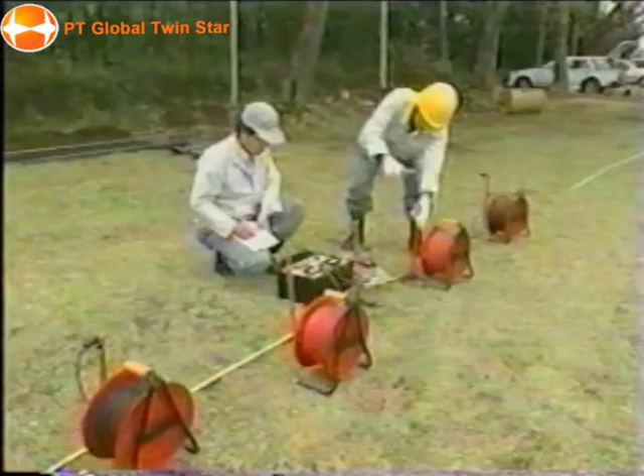Let us introduce the standard work procedure of SAN-EARTH type M5C used for grounding works. Before actual grounding work, solid and exact design work is vital and important. Once the grounding site is selected and the requested grounding resistance is decided, first of all, measure the ground resistivity of the work site.

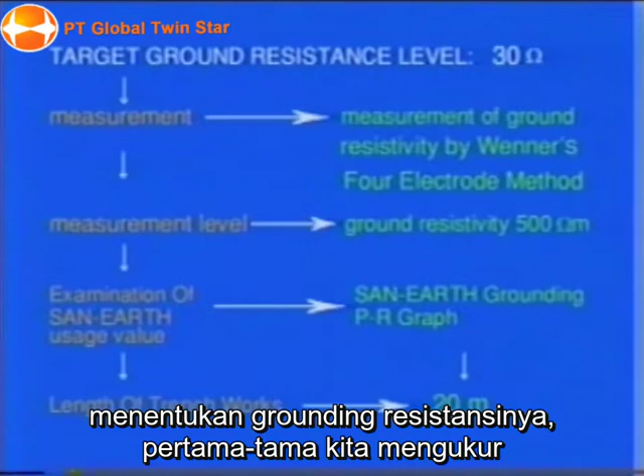Using Wenner's 4-electrode measurement method, the result is used to calculate the construction length of SAN-EARTH grounding. If the design work in this way has been completed, the site grounding work will be next.

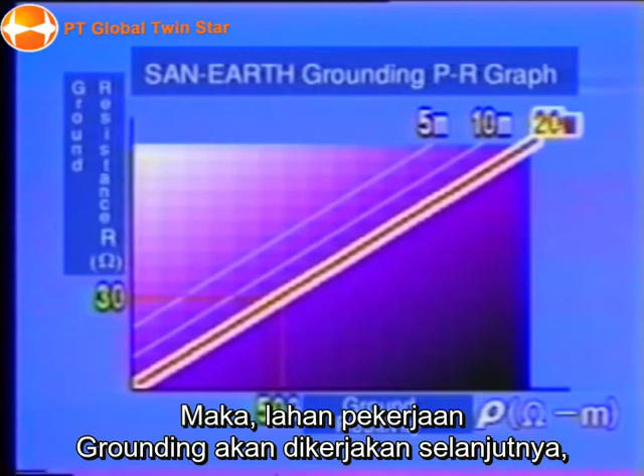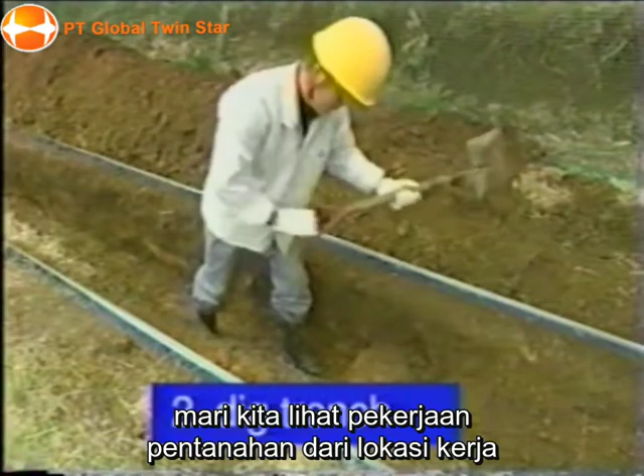Let us look at the grounding work of the work site. Firstly, dig a trench with width more than 50 centimeters and depth 75 centimeters approximately. This can be done manually or by machines utilizing a backhoe where the work site permits. In either case, level the bottom as flat and even as possible.

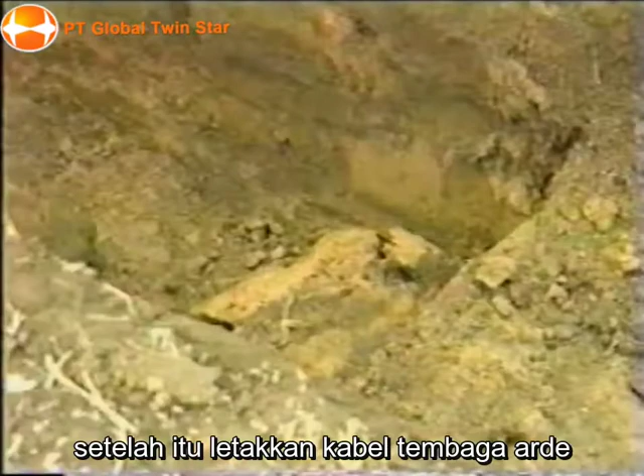After that, lay the grounding copper wire in the trench. About 22 square millimeter size is sufficient. Lay the wire by holding the wire roll so that the wire lies straight at the center of the trench.

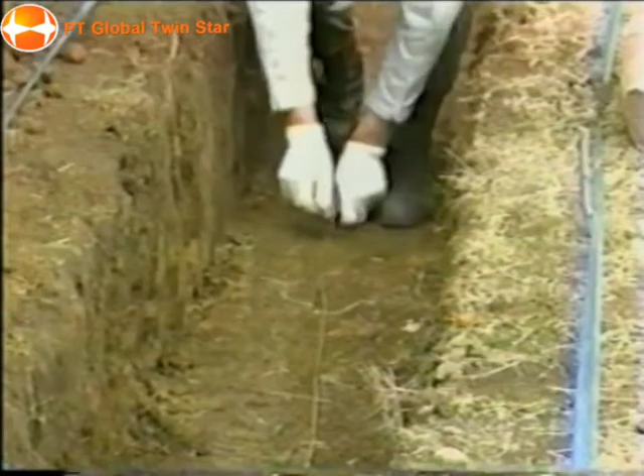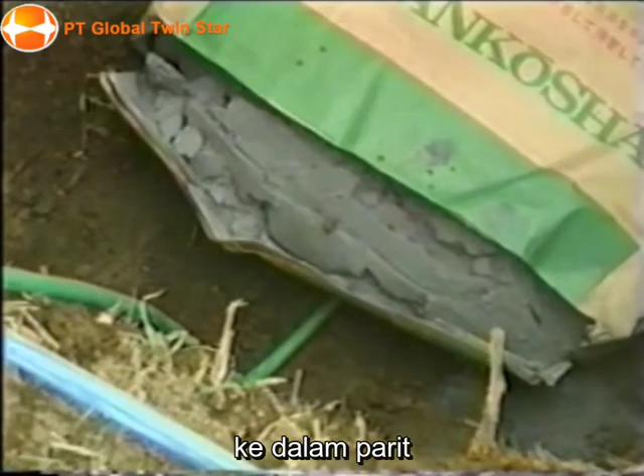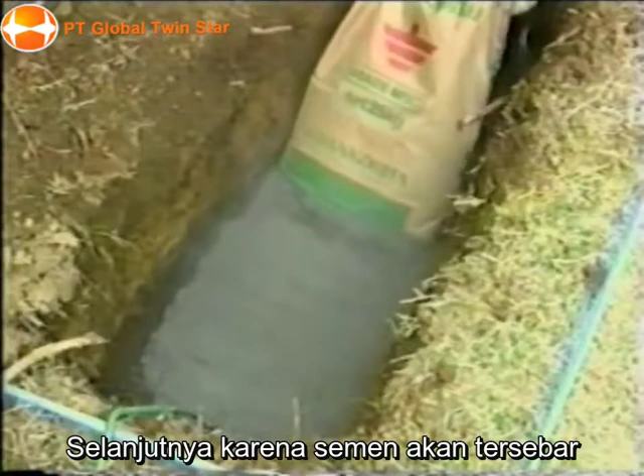Next is SAN-EARTH laying work. Place SAN-EARTH type M5C along the trench at 3-meter intervals. Cut the bottom of the bag by cutter knife and while dragging along, shake off and spread evenly into the trench. A 25-kilogram bag is good for about 3 meters laying work. Furthermore, since it will overspread while laying, it will be good to carry it out against the wind.

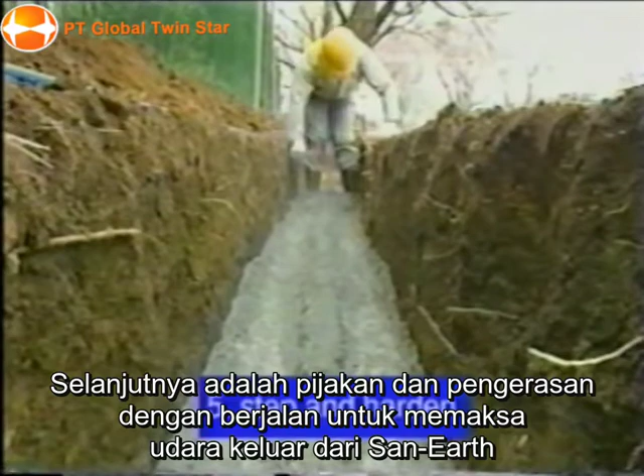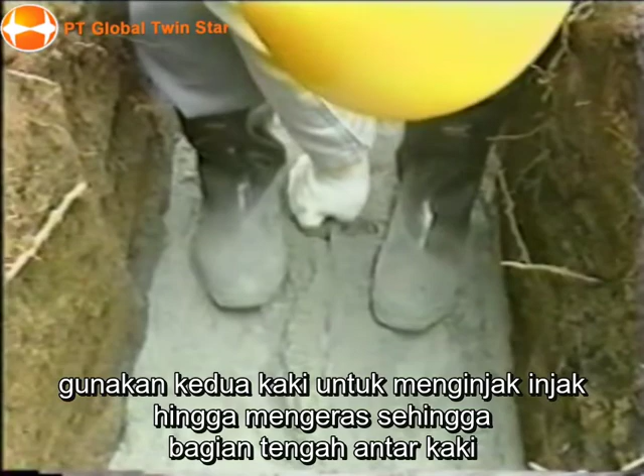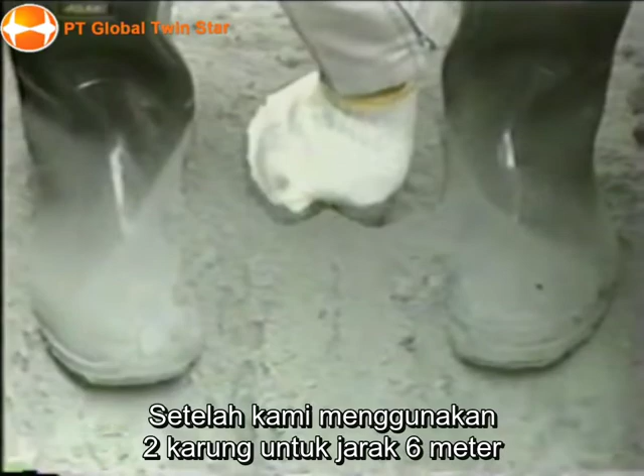Next is stepping and hardening by foot to force out air in San-Earth. Firstly, pick up the laid grounding copper wire, use both feet to step and harden so that the center part between the feet becomes higher, and the wire is fully packed and covered by San-Earth. Furthermore, it's more effective to carry out this process after every 2 bags, 6-meter interval, before San-Earth absorbs soil water and becomes hardened.

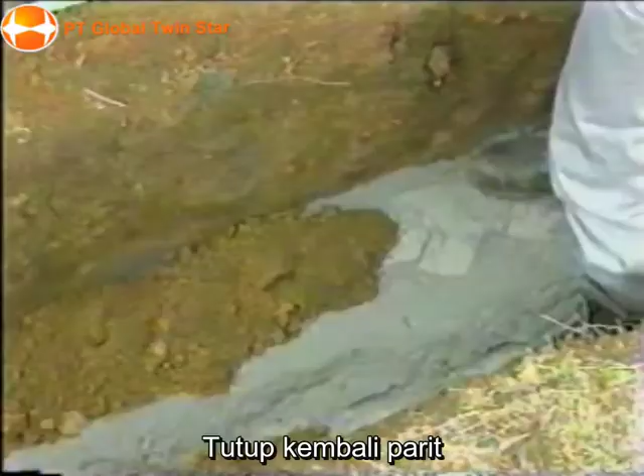After the stepping and hardening process, cover back the dark soil into the trench. In the beginning, cover back the dark soil which does not mix with stone from both sides of the trench gradually. The copper wire should not be left visible above San-Earth when covering back the dugout soil. Then step and harden it.

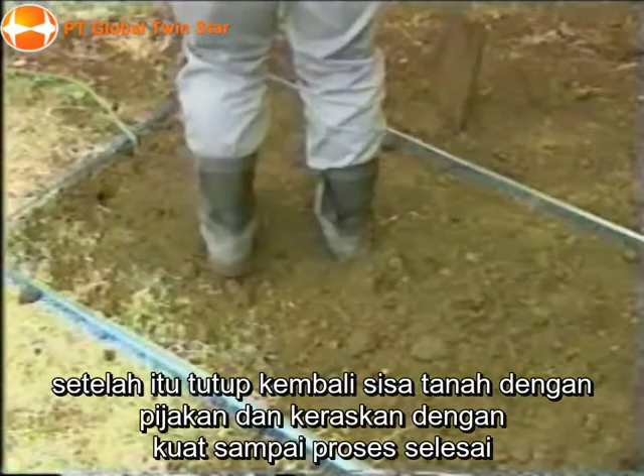Different from other resistance-lowering material, the grounding resistance can be measured at this point of time. After that, cover back the rest of the soil, step and harden firmly, and the process is finished. After finishing the process, the measurement of grounding resistance comes next. Confirm whether the expected value can be obtained or not.

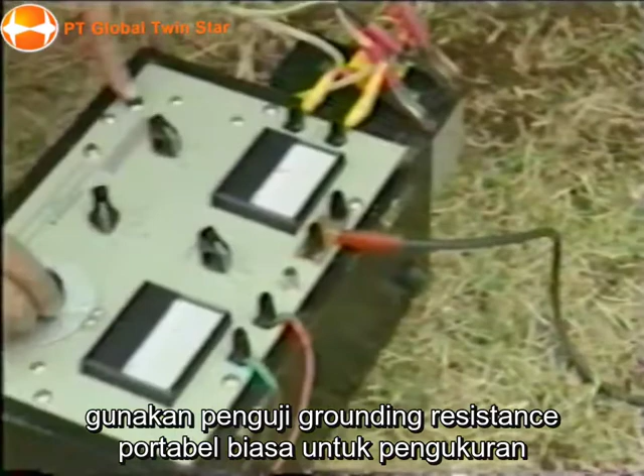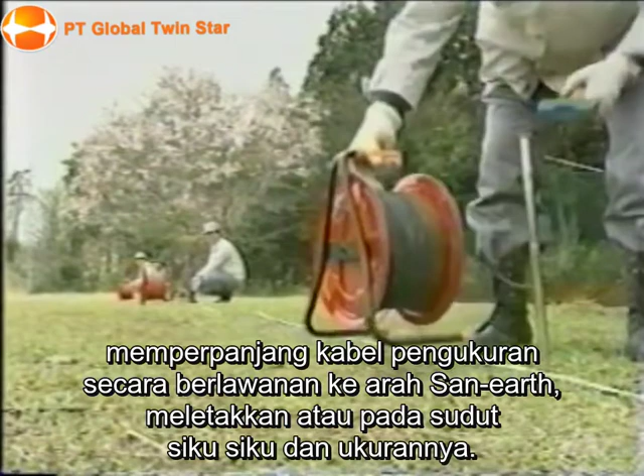Use the normal portable grounding resistance tester for measurement. This is called the 3-electrode method. Extend the measurement wire opposite to the San-Earth laying direction or at a right angle to it and measure. The above-mentioned procedure is the San-Earth type M5C standard work introduction.

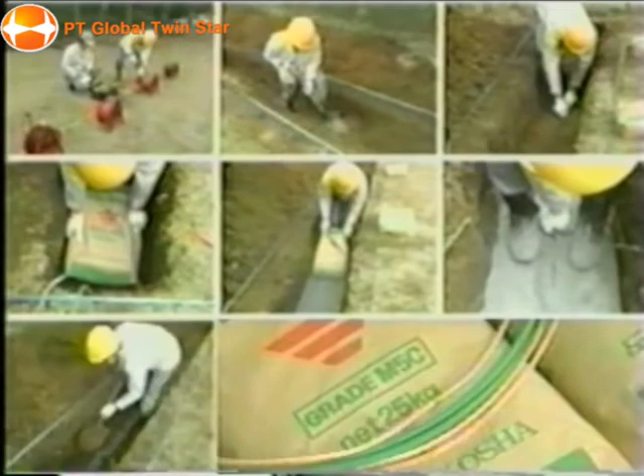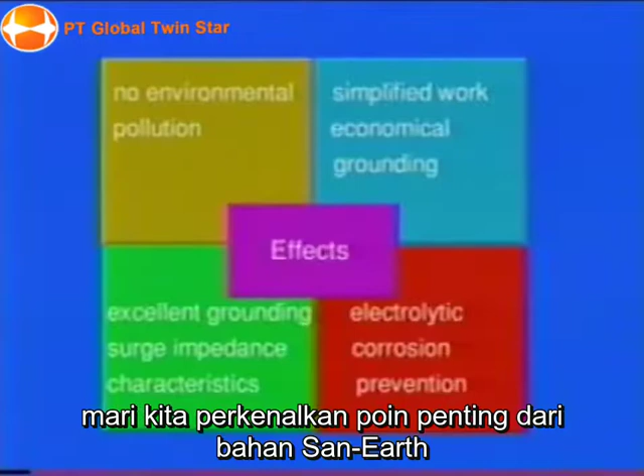Let us introduce the strong points of San-Earth grounding material. As you can see from the grounding work procedure, San-Earth type M5C is used in powder form and laid in a belt shape during works. Low grounding resistance can be obtained from good contact of wide surface area with the earth.

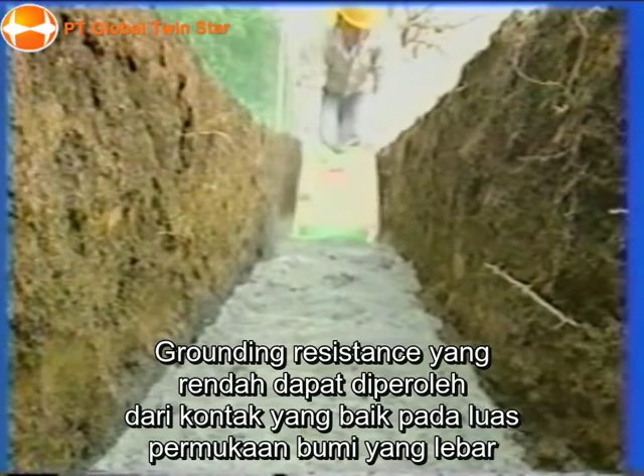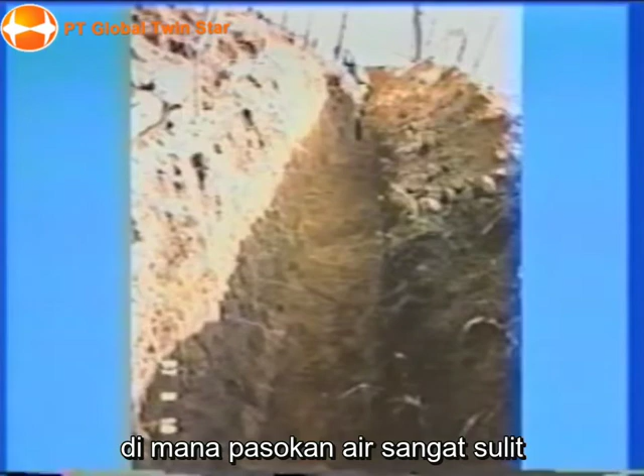Furthermore, water is not necessary during grounding work. It is more suitable for mountainous or remote areas where secure supply of water is very difficult. In areas which have roots after felling or lumbering, or rocky projections from the ground, grounding works will not be hindered and therefore great saving in labor is possible.

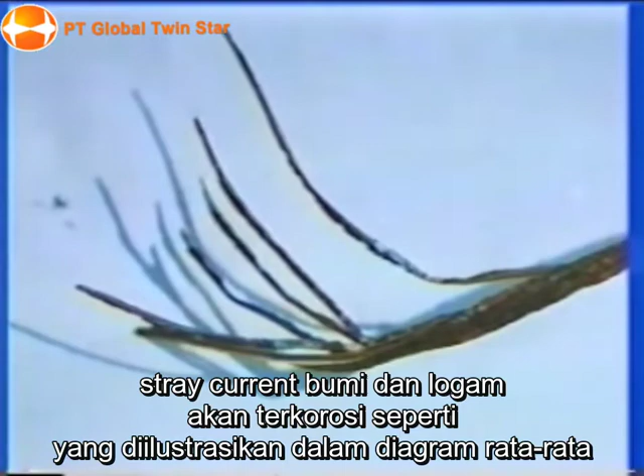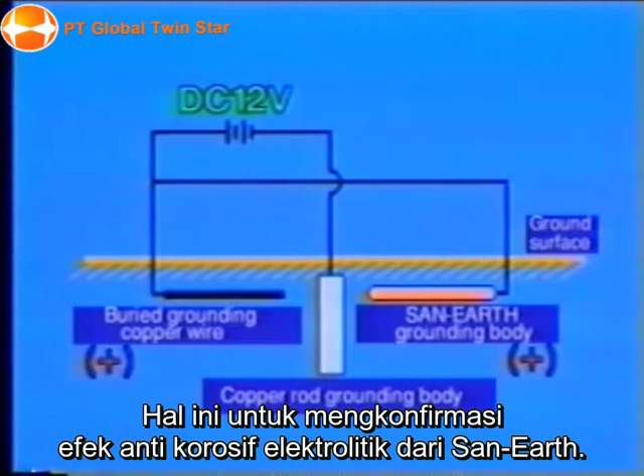For metals laid underground, there will be electrolytic corrosion due to the earth's stray current and the metal will corrode. As illustrated in the diagram, an average current of 60 amperes flows for a 75-day period in the experiment circuit to compare the corrosion situation. This is to confirm the electrolytic anti-corrosive effect of San-Earth.

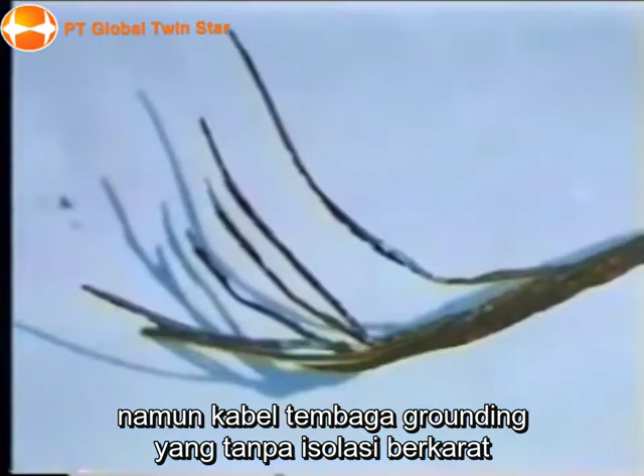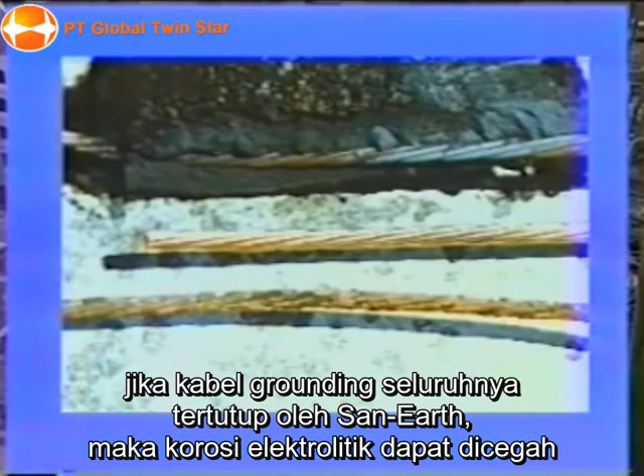As you can see, the wire covered by San-Earth is not corroded. However, the bare grounding copper wire is corroded and became tattered and ragged. If underground metal is completely covered by San-Earth, electrolytic corrosion can be prevented, and disconnection or breaking of wire due to grounding electrode corrosion can be avoided.

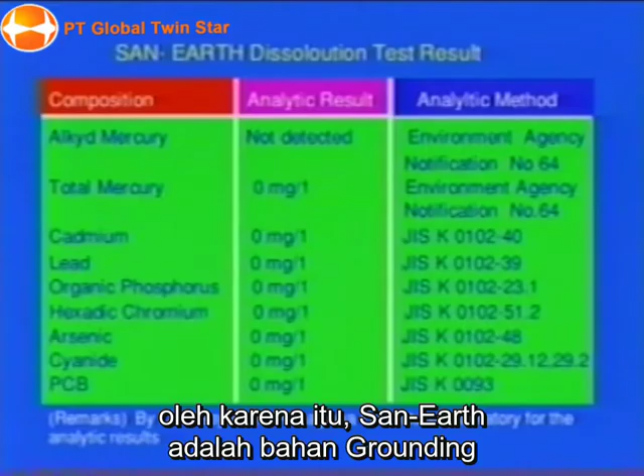San-Earth is a very chemically stable material, which means that chemical changes like dissolution or electrolysis under the ground will not take place. Therefore, it is a grounding material which does not cause environmental pollution and can be used extensively without worry at farms, clean water pipes, fishery farms, etc.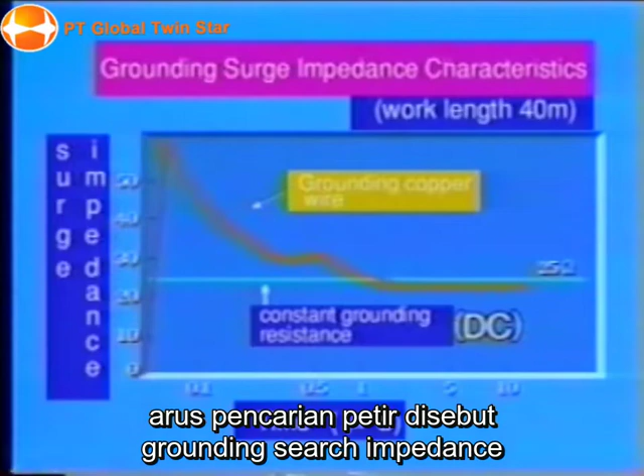When performing grounding works, we must bear in mind one important thing. When lightning surge current flows into the ground electrode, the characteristics of grounding resistance are different from normal grounding resistance measured by DC current. The characteristic for this lightning surge current is called grounding surge impedance.

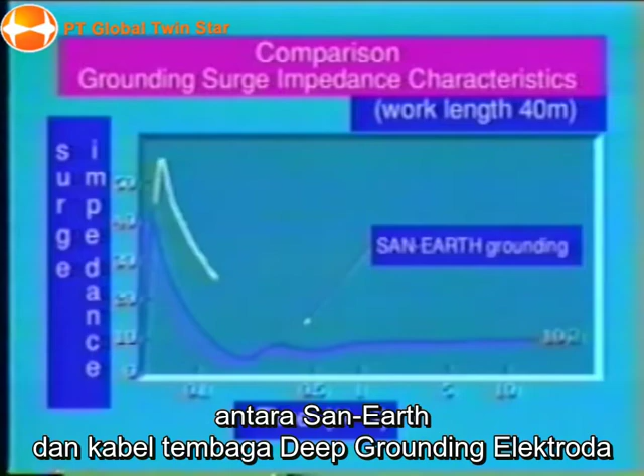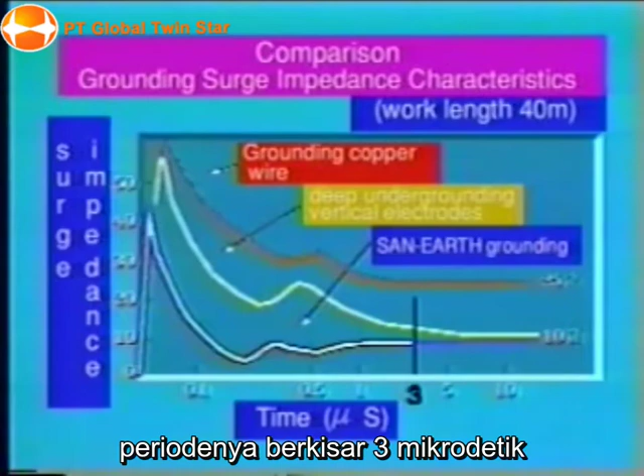In this diagram, a comparison of grounding surge impedance between SAN-EARTH grounding and a grounding copper wire deep grounded electrode of 40-meter work length is shown. It can be seen that for the deep grounded electrode made by a boring process, compared to the SAN-EARTH electrode, grounding surge impedance is higher for the period up to about 3 microseconds. This indicates that SAN-EARTH grounding is the most excellent grounding for protecting low withstand voltage equipment like computers from lightning surge current.

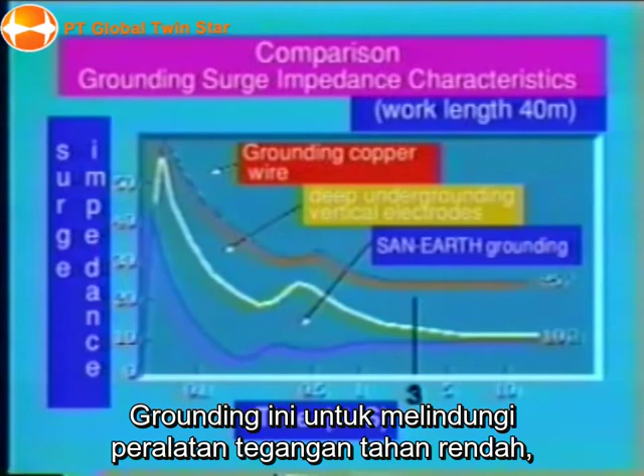For the purpose of lowering grounding resistance, conductive materials for lowering resistance in use are the electrolytic material type, which uses chemical material, and the conductive material type of resistance lowering material like SAN-EARTH. The diagram shows the comparison of grounding resistance changes in a 10-year period.

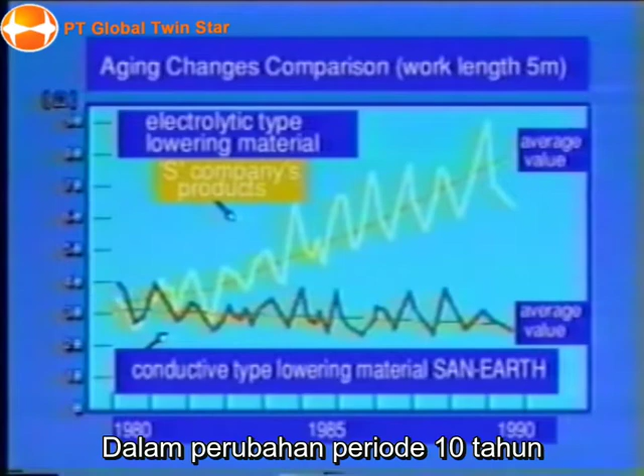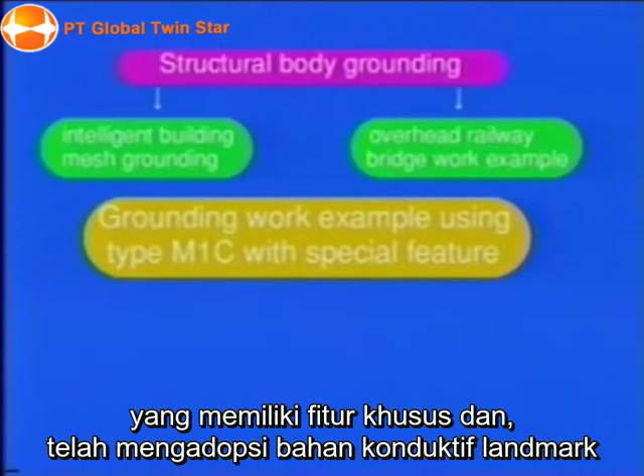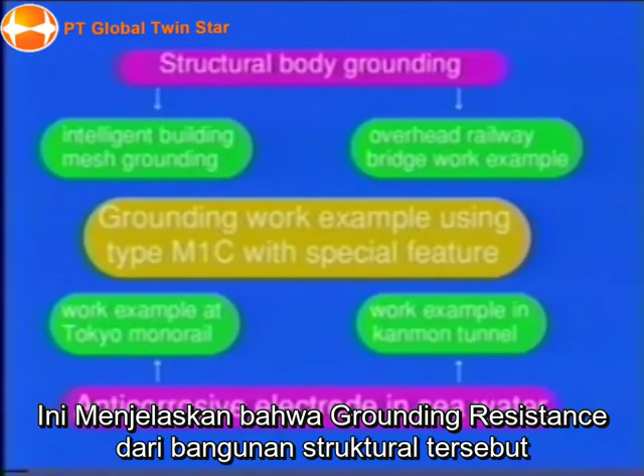Let us introduce a few grounding work examples which have special features and have adopted the landmark conductive material for lowering resistance to grounding, SAN-EARTH type M1C. It is clear that the grounding resistance of structural buildings built by steel reinforced concrete, like the groundwork of huge buildings or steel towers, overhead bridges, overhead railway bridges, etc., is much lower than the grounding resistance of normal grounding works.

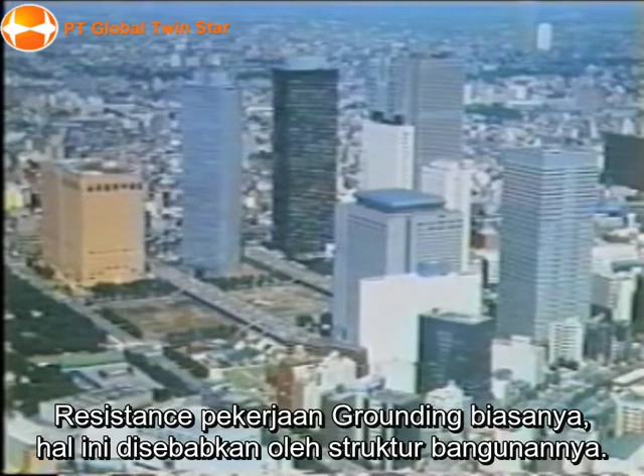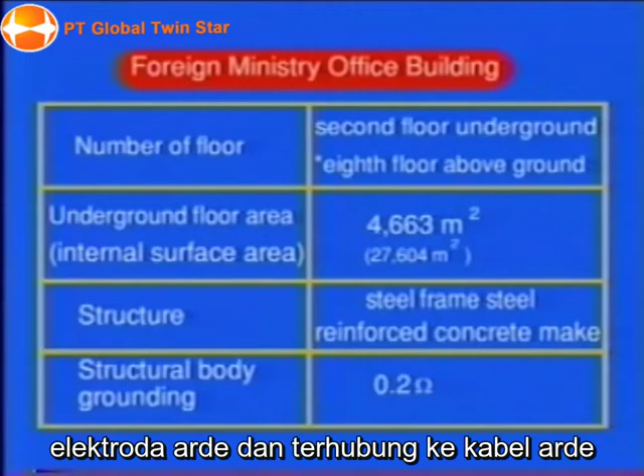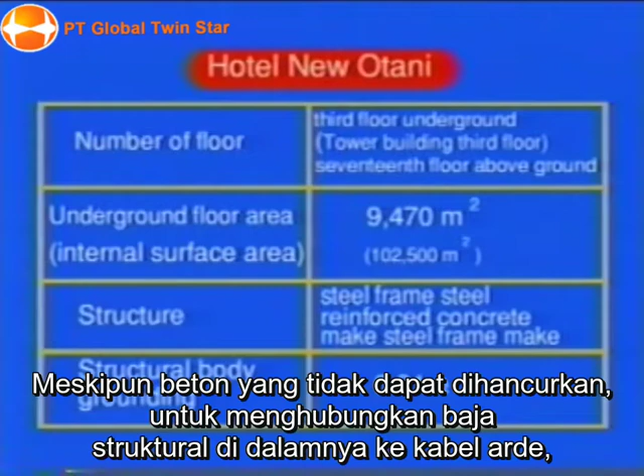This is due to the structural building's groundwork foundation, which has a large contact area with the earth. For these low grounding resistance structural buildings, using the structural steel as a grounding electrode connected to a grounding wire is called structural body grounding. However, the concrete cannot be destroyed to connect the structural steel in it to the grounding wire. In that case, we have the plaster process using San-Earth conductive cement as the solution.

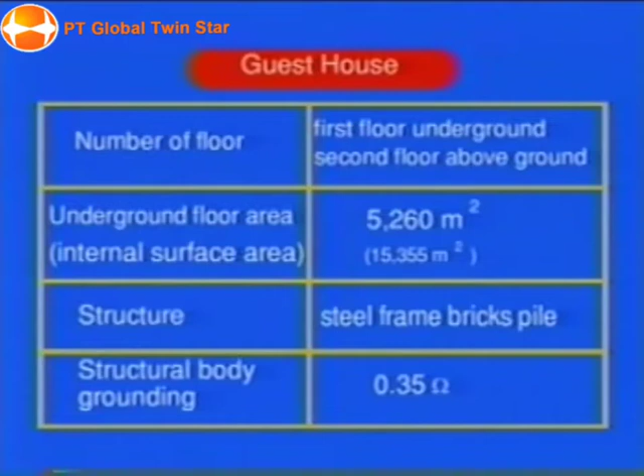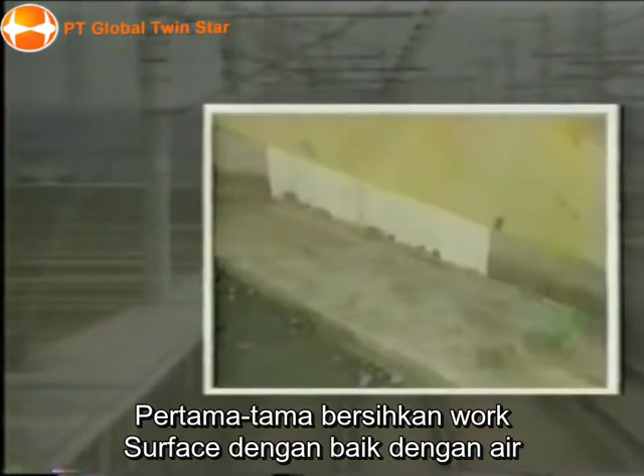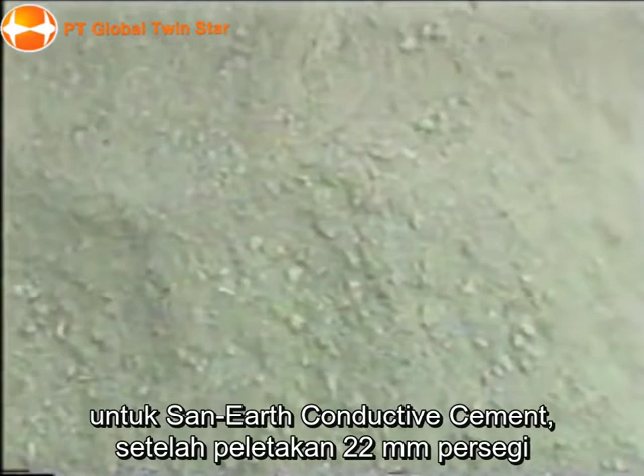Well, let us introduce the work example on an overhead railway bridge. First of all, clean the work surface well with water. Add water to San-Earth type M1C and knead together, creating a suitable hardness for San-Earth conductive cement. After laying the 22 square millimeter conductive wire on the work surface, completely cover the wire with San-Earth conductive cement.

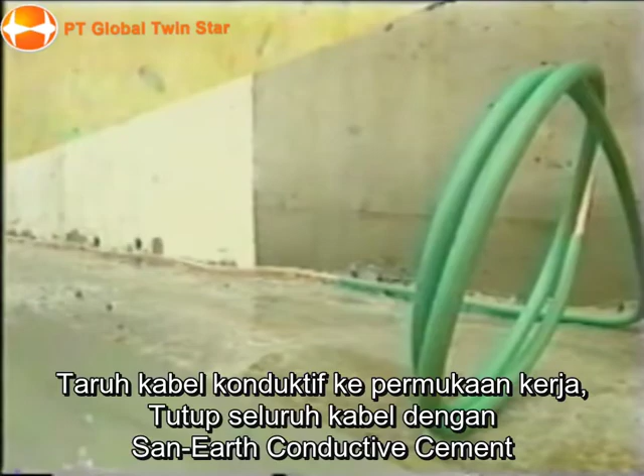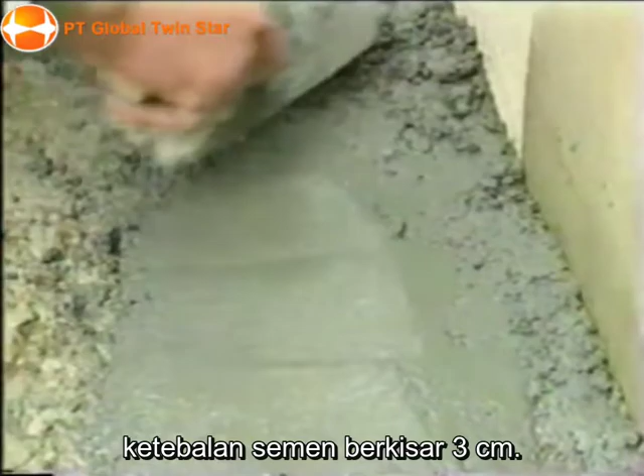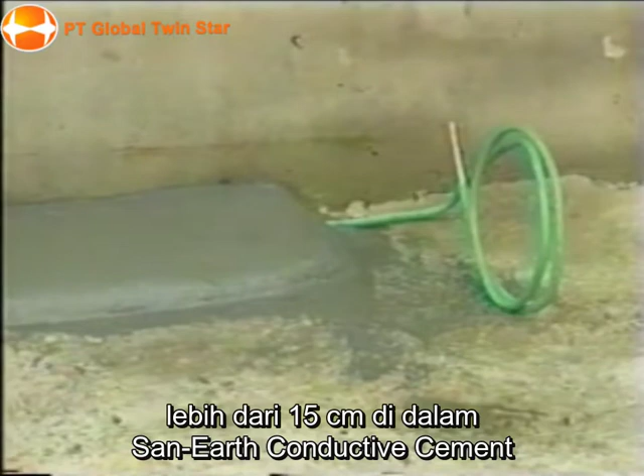In this case, level it with a smoothing iron so that the San-Earth conductive cement thickness is about 3 centimeters. For the drawn-out part of the grounding wire, bury the insulation sheath more than 15 centimeters inside the San-Earth conductive cement. Use a plasterer's iron to poke well and force out the air inside. Finish by making the surface level and even.

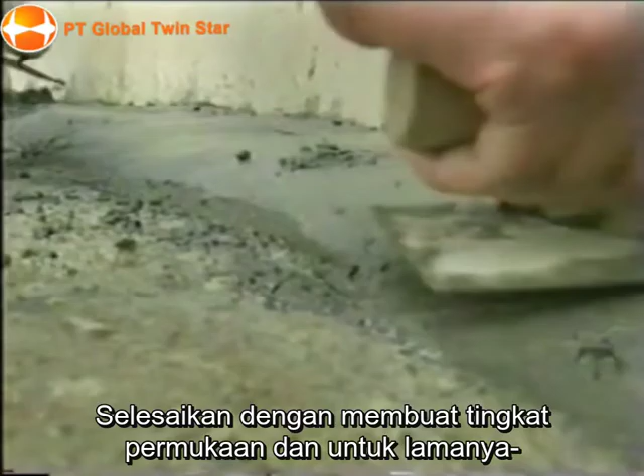30 to 40 minutes later, when the water on the surface has reduced, apply normal cement about 3 centimeters thick on top for protection. That is all for grounding work of structural buildings.

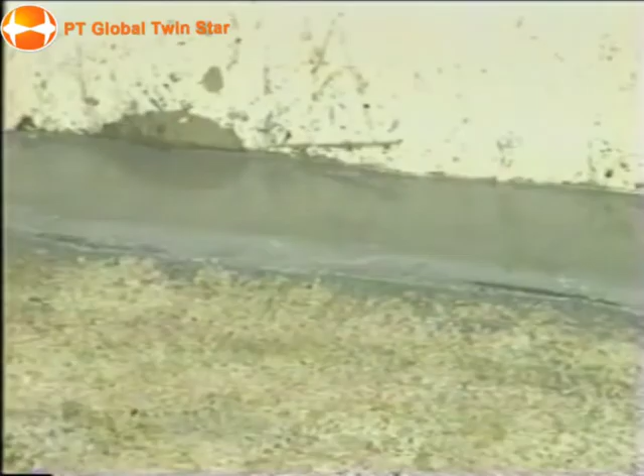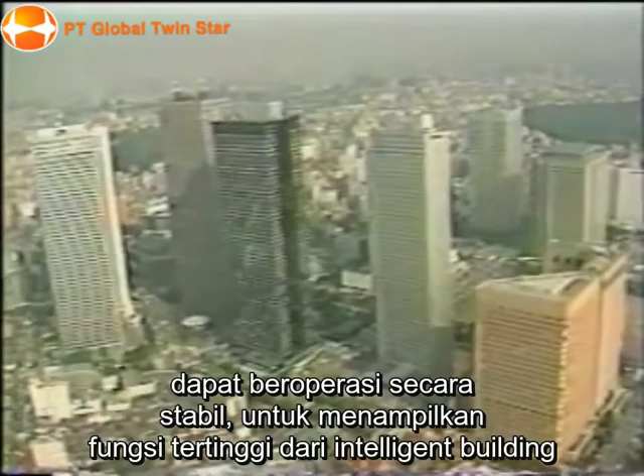In the intelligent building, which is a symbol of the highly information-oriented era, there are many types of equipment being installed, including OA equipment like communication equipment, building management system equipment, etc. There are many power supply equipment and facilities for these, and many of them require proper grounding work. The grounding for an intelligent building has an extremely important role to ensure all the electronic equipment can operate stably to display the highest function of the building.

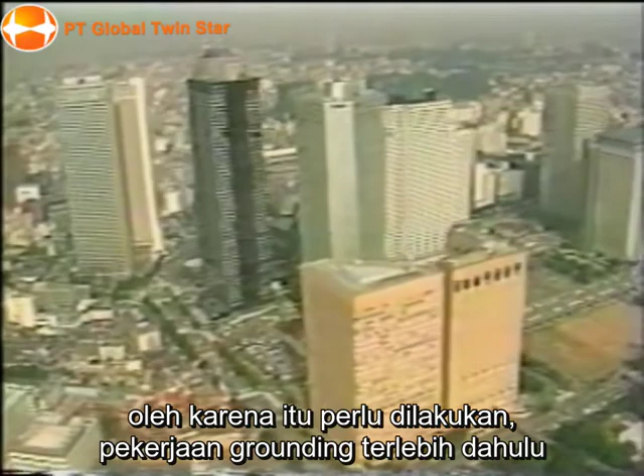This type of building requires better grounding than normal grounding. Therefore, it is necessary to perform grounding work first during the stage of foundation work. As an example, let us introduce a radio station building's grounding work combined with radial earth using San-Earth.

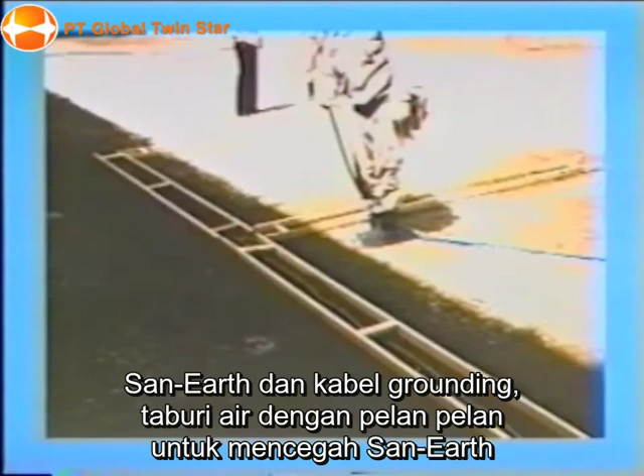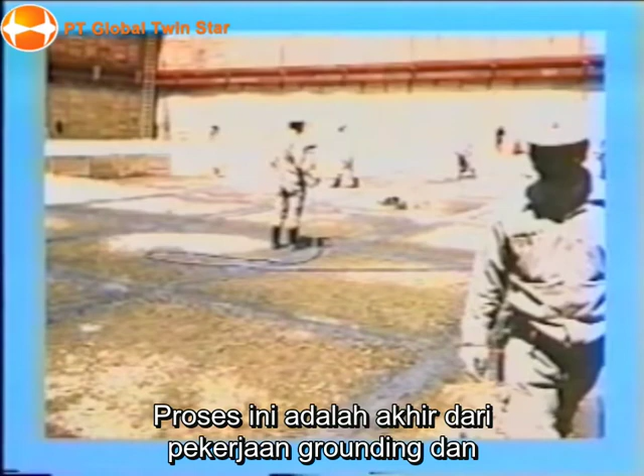After finishing the soil hardening of the work ground surface, lay grounding copper wire in a mesh net shape. Place the wooden frame and sprinkle water, then follow by laying San-Earth and bundling up the ground wire. Sprinkling water gently prevents San-Earth from scattering and also helps improve the hardening process. This is the end of grounding work, and foundation work begins.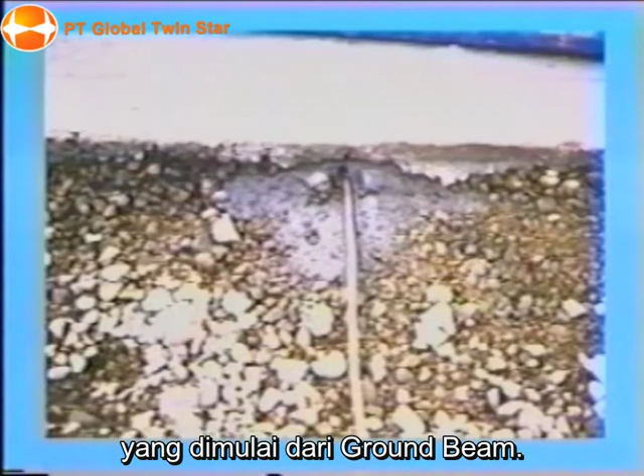Grounding work shifts to the next section in order. The section with completed grounding work will begin construction of the ground beam. The above is an example of San-Earth mesh grounding work basics for buildings.

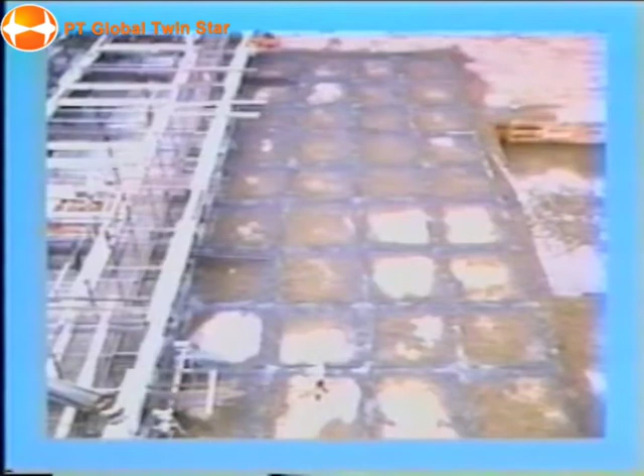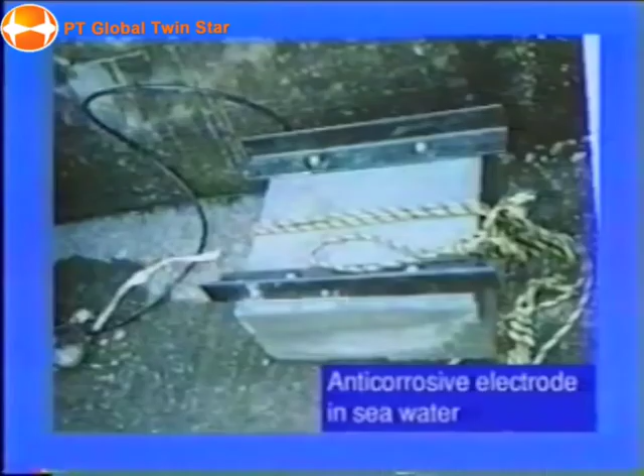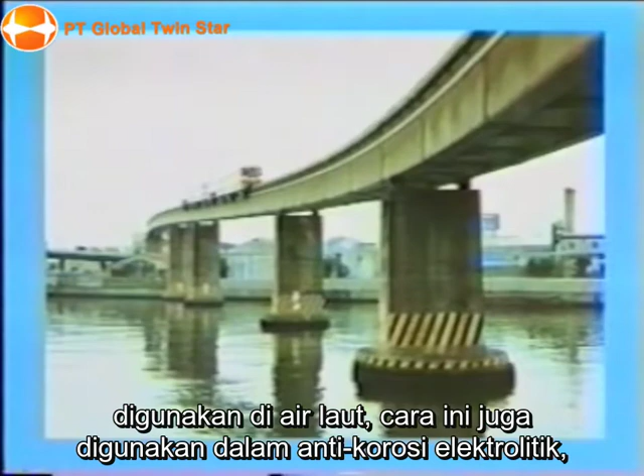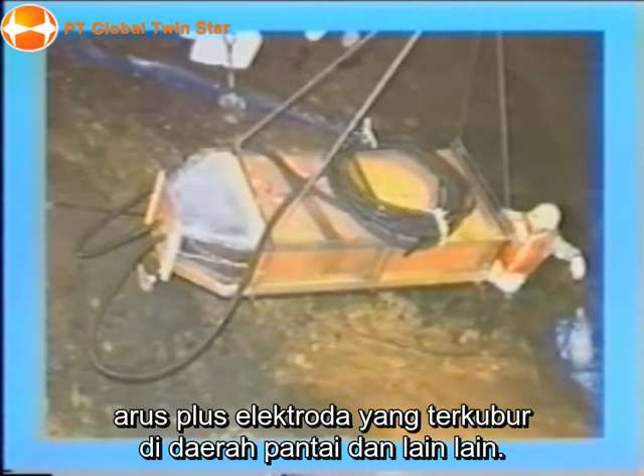Grounding electrodes made from San-Earth conductive cement are strongly anti-corrosive and therefore will not corrode even when used in seawater. In this way, it is being used in electrolytic anti-corrosion, in telecommunication grounding for the Tokyo monorail or Kanmon tunnel, and also as forced current plus electrodes buried in coastal areas, etc. It is used extensively in electrolytic anti-corrosion.

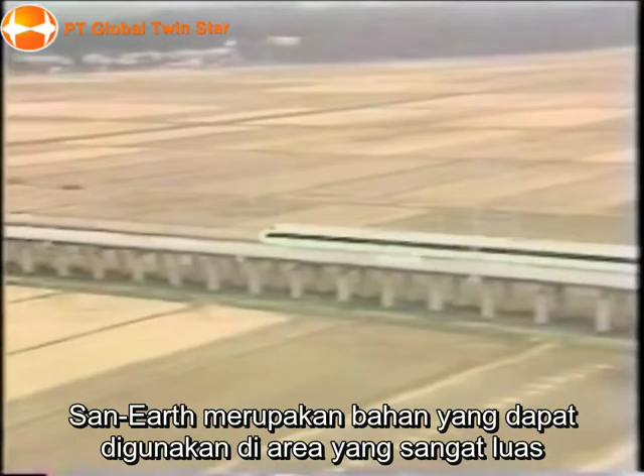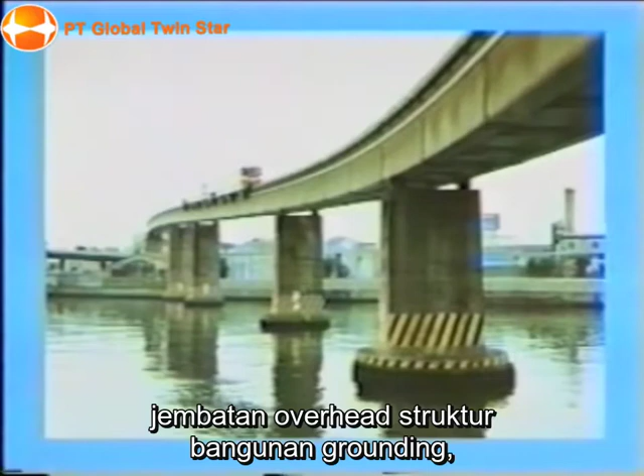As mentioned in the above introduction, other than common use grounding, San-Earth is a material which can be used in an extremely wide area of grounding processes, like mesh earth of power stations or substations, steel tower foundations or railway overhead bridges, structural body grounding of structural and intelligent buildings, and also electrolytic anti-corrosion in seawater.

Through the landmark conductive material for lowering resistance to grounding, San-Earth, which is being used for protecting equipment and important human life in grounding technology indispensable to the information network of the 21st century, Sankosha has achieved further contribution to system security and the progress of society.